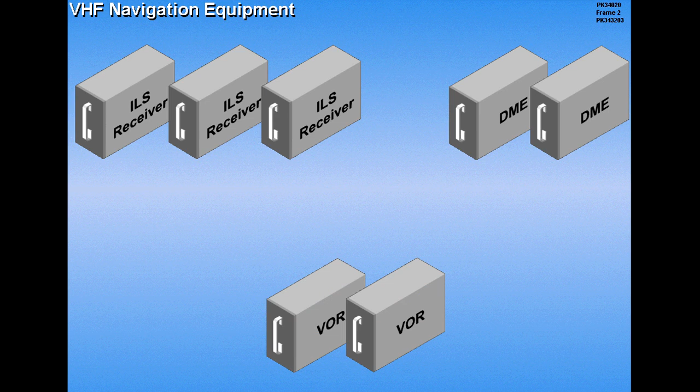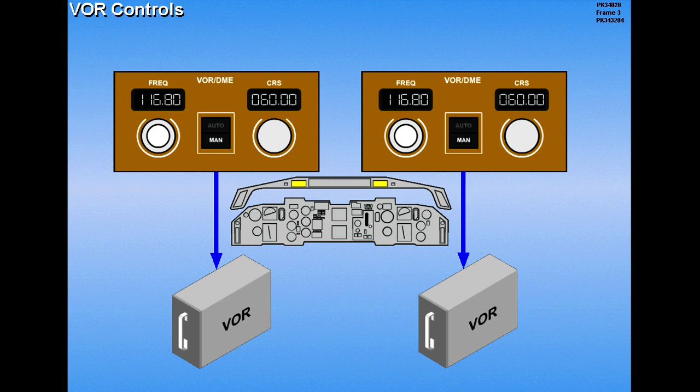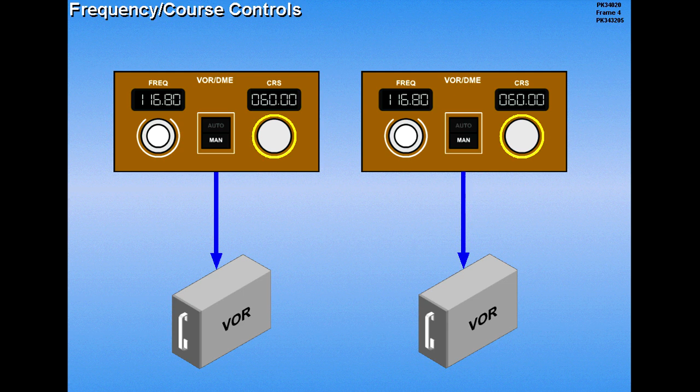The VOR receivers, left and right, are controlled by the respective control panel located on the glare shield. The control panels are identical, with conventional controls for VOR tuning and course selection. The Auto Manual Select switch allows automatic FMC or manual VOR tuning. With manual selected, the VOR is tuned by manually setting the desired frequency in the frequency indicator. Now click on the Auto Manual Select switch to select Auto Tuning.

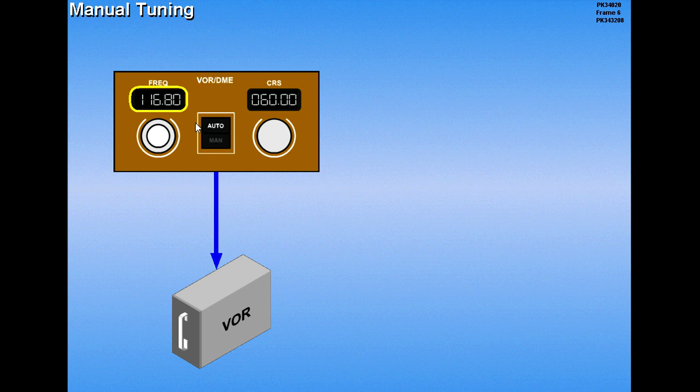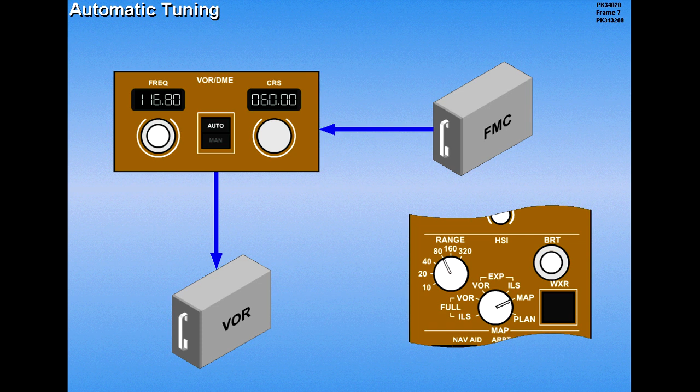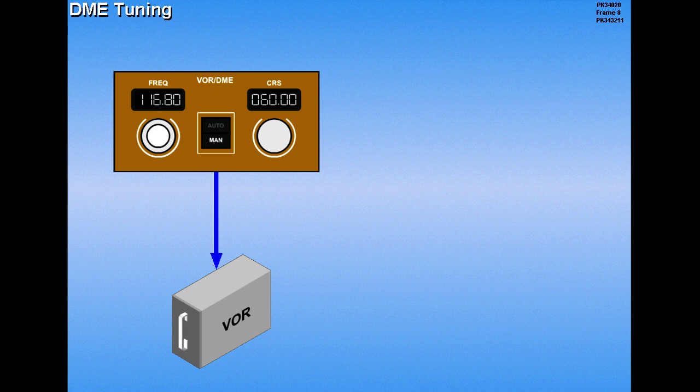In Auto, the FMC will automatically select and tune the appropriate VOR, providing the HSI mode selector is in the map or plan mode. The tuned frequency is displayed in the frequency indicator. Anytime the VOR is being tuned, either manually or automatically, the associated DME is automatically tuned by its respective VOR.

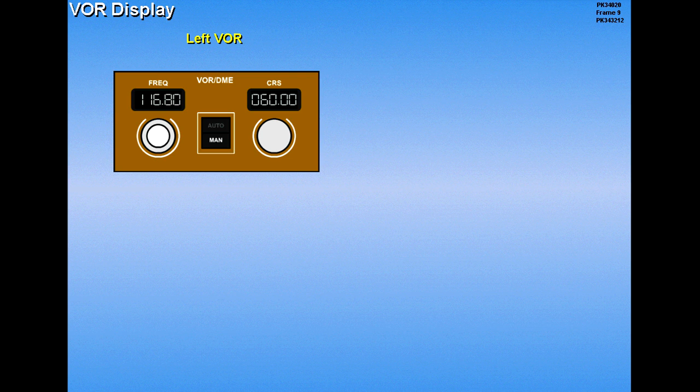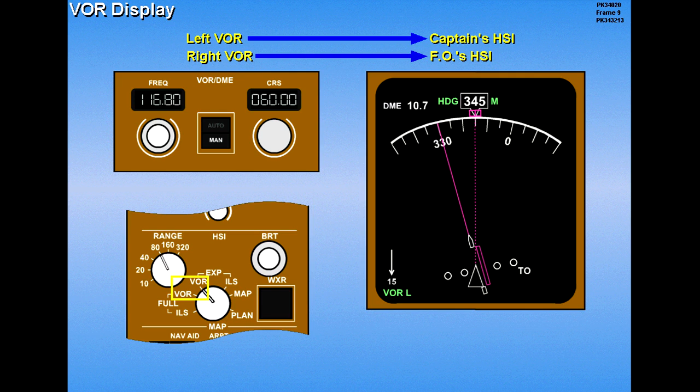Navigation data from the left VOR is displayed on the captain's HSI, providing the HSI mode selector is in VOR mode. Data from the right VOR is displayed on the first officer's HSI when VOR mode is selected. The tuned VOR can be aurally identified using the Audio Selector panel.

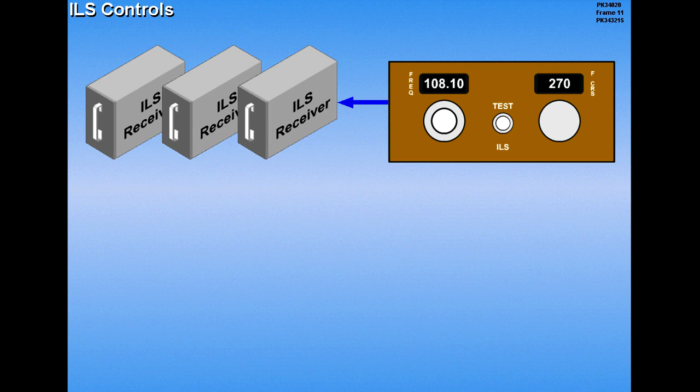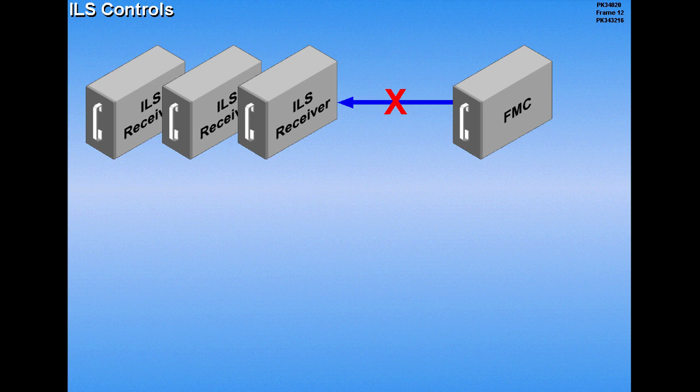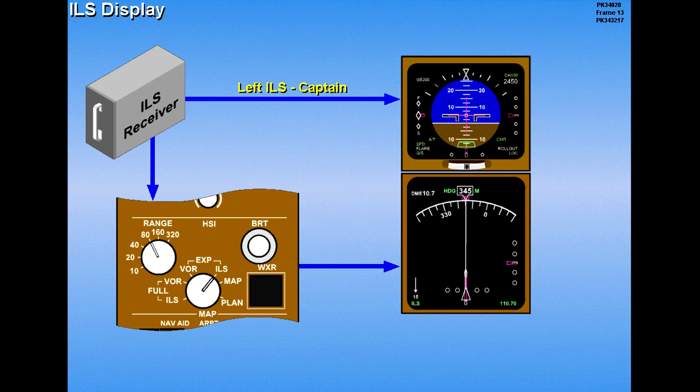The 3 ILS receivers are simultaneously tuned by a single ILS control panel located on the aft pedestal. Unlike the VORs, the 3 ILS receivers cannot be automatically tuned by the FMC. The left ILS provides course and glide slope signals to the captain's ADI, and if the ILS mode is selected on the mode selector, the HSI. The right ILS provides signals to the first officer's instruments.

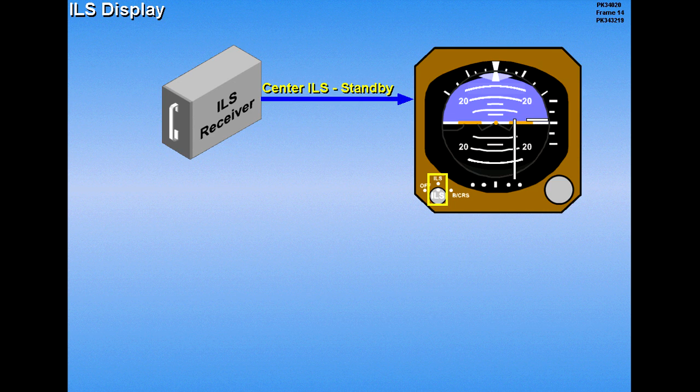When ILS is selected on the standby attitude indicator, the center ILS provides raw data indications. ILS information is also supplied to the FCCs.

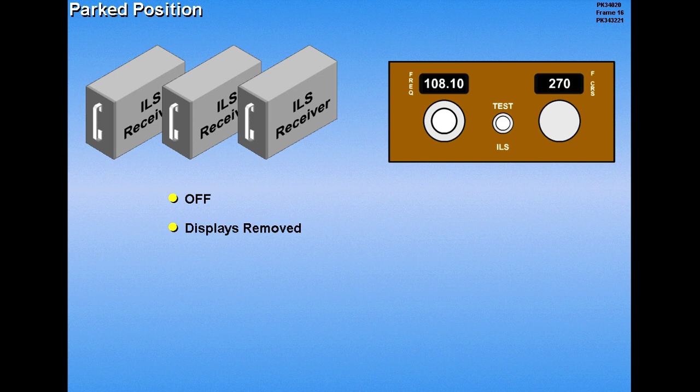All 3 ILS receivers are turned off and the ILS displays are removed from the instruments by rotating the frequency selector to the parked position. The frequency indicator displays PK. If the indicator has LCDs, dashes are displayed.

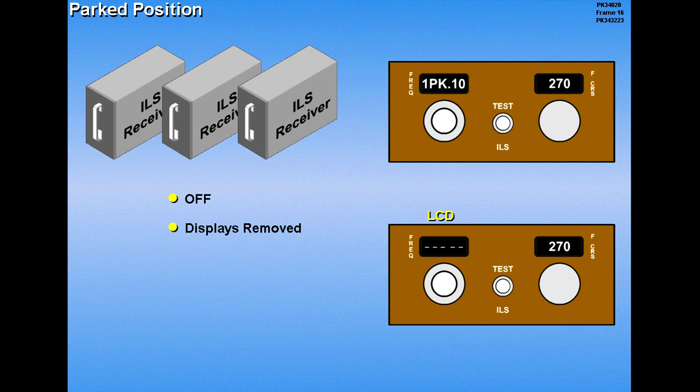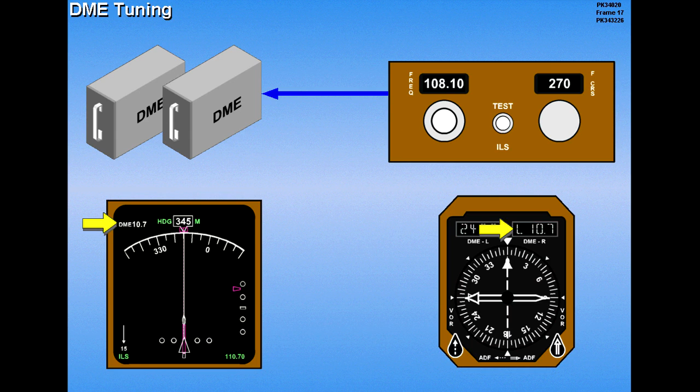The DMEs associated with ILS localizers are tuned manually by the ILS control panel. The localizer DME is displayed on the HSI. The localizer DME on the RDMI is preceded by the letter L. ILS frequencies can be identified using the Audio Select panel.

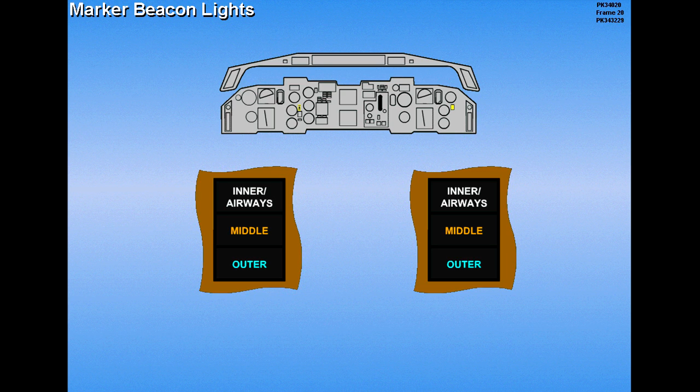Let's now look at the marker beacon and ADF. The captain's and first officer's marker beacon lights are located on each instrument panel. They are illuminated by a single receiver with no controls.

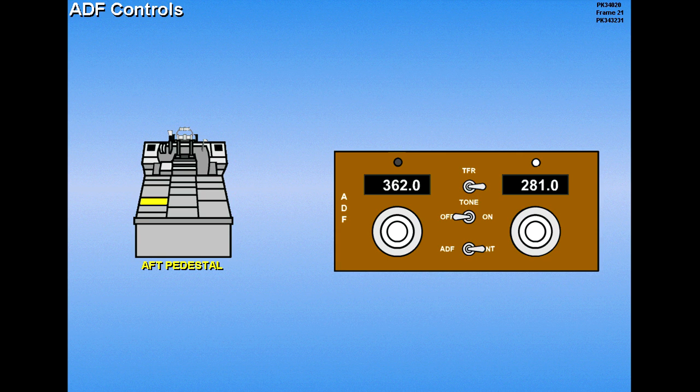A single ADF is installed with the control panel located on the aft pedestal. The control panel has 2 frequency selectors, each with a corresponding frequency indicator. The transfer selector allows selection of either frequency. Positioning the selector towards the desired frequency illuminates a white transfer light.

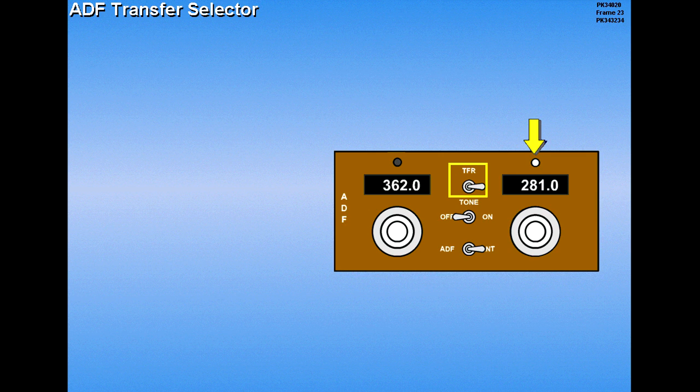Setting the mode selector to ADF activates the direction finding mode and sends ADF bearing to the RDMIs. The antenna position optimizes audio reception. However, no bearing is sent to the RDMIs.

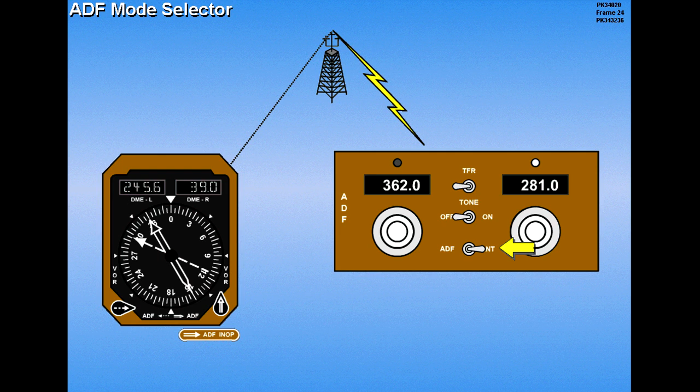The tone switch should be off to receive normally modulated station identifiers. The on position is used to identify a station having an unmodulated signal. The station can be aurally identified using the Audio Select panel.

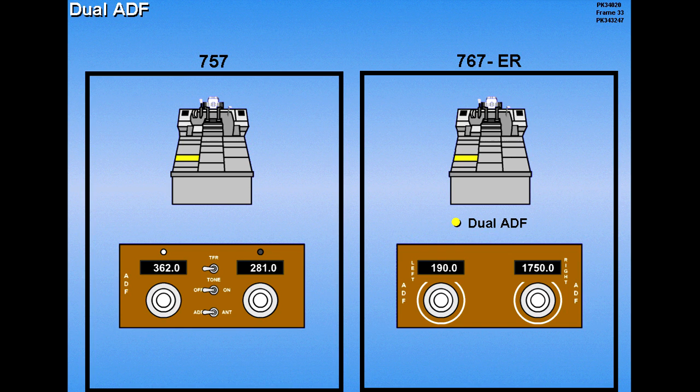Two ADFs are installed on the ER with a single control panel located on the aft pedestal. Bearing to the left and right ADF stations are displayed on the HSIs, regardless of HSI mode selection.

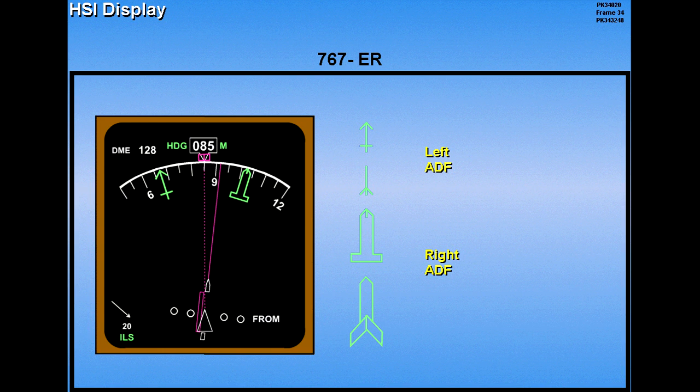Bearings to both stations are also displayed on the RDMI when selected by the mode selectors.